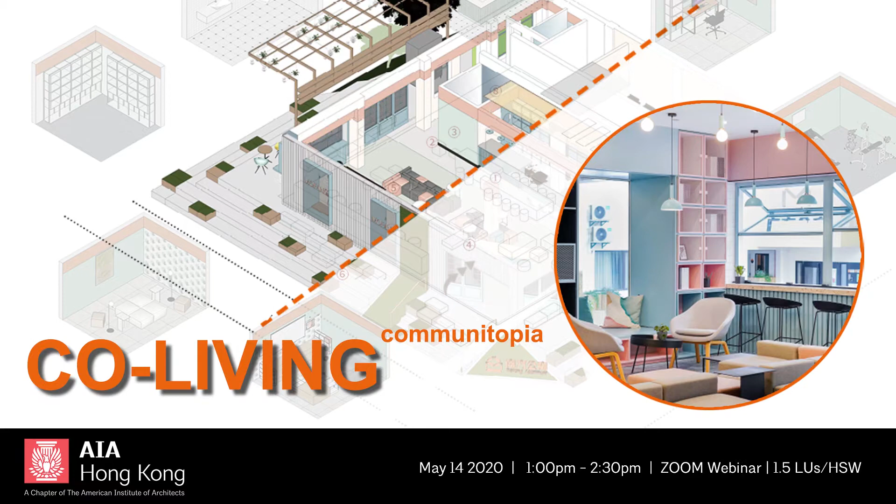So COVID-19 has affected all of us in one way or another. But before COVID-19, many urban centers were already experiencing systematic challenges and stresses. In Hong Kong, we were and remain divided over essential access to fundamental resources like affordable housing, office space, and education. The COEX series is where we take this moment of interruption to re-examine these three typologies, where we look for resources and design strategies to design more resilient communities for tomorrow.

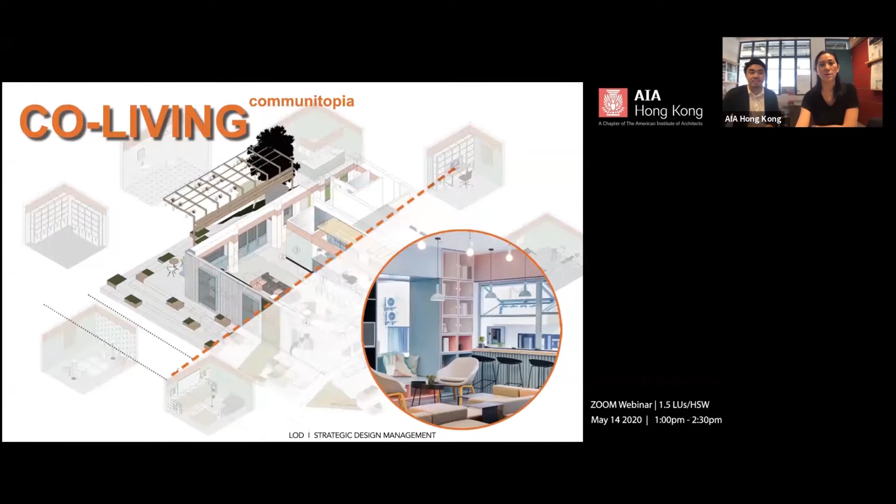So today we're going to share about our co-living projects, and we're going to go through our projects in China, and at the same time we want to introduce the idea of communitopia while we're working on the co-living projects, because co-living itself is, we see it as a utopian response to our rapidly changing society. So instead of just looking into providing affordable housing, we also want to use this opportunity to see how we can create a more caring community and integrate different user groups so that we can pool the resources together and build a new community use for the public.

So we have been working on co-living projects since 2015, and we have projects from 100 square meters, just working on a public space for co-living apartments, or large scale neighborhood and community planning that is over 100,000 or even 300,000 square meters on a planning level. So there are over 80 projects that we have worked on and over 1 million square meters in total. Of course, some are built, some are unbuilt, and there would be a total of about 25,000 rooms, units, I would say, that we have built.

And usually when we're doing co-living projects, one challenge is that we're working with old buildings. So at the same time, we are also dealing with urban revitalization and how to readapt the building to new use. And a lot of the buildings in China that we've been working on, they are probably vacant offices that are in the middle of city center, or they are industrial factories that are no longer being used and at good location, good neighborhoods. So a lot of the times the clients would like to turn them into co-living apartments, which they would be able to generate better revenue.

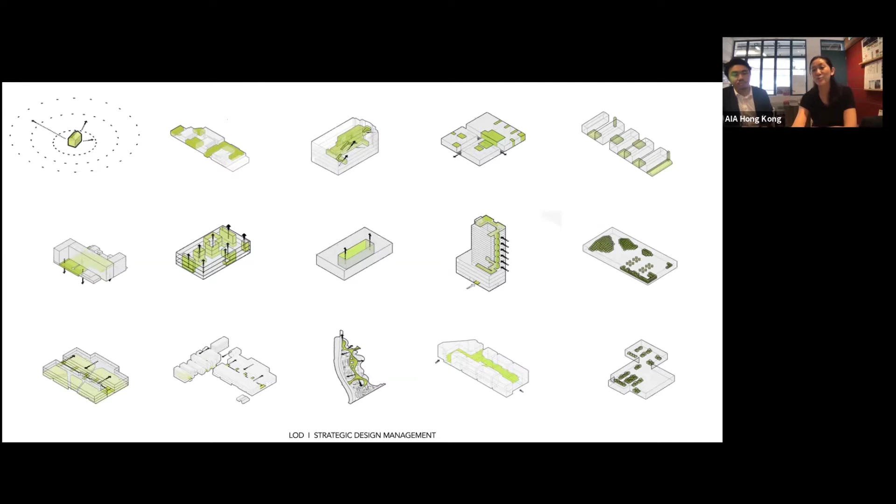We take every opportunity, if there's a little exterior balcony or roof garden somewhere, to turn it into habitable space, especially outdoor space for the residents, because it's always very nice to have this kind of space in your living apartments.

There are a few strategies that we employ when we're looking at co-living. We'll talk about them as we go through the presentation, throughout our different projects, and show how these strategies would actually happen in the projects.

Number one, we call it urban devices. We're trying to use these urban devices to recreate—as I mentioned earlier, a lot of these projects are actually urban revitalization projects. As we look into the city we're living in right now, there are a lot of...

memories or old neighborhoods, those kinds of community values and community services that we used to have in the old days—they are disappearing as we live in high-rise towers and very contained neighborhoods that are all fenced off. So we hope to use these co-living projects also as an urban device, so that we can recreate what we mean for city and community, and also reintroduce places like marketplaces, streets and alleys to the neighborhoods.

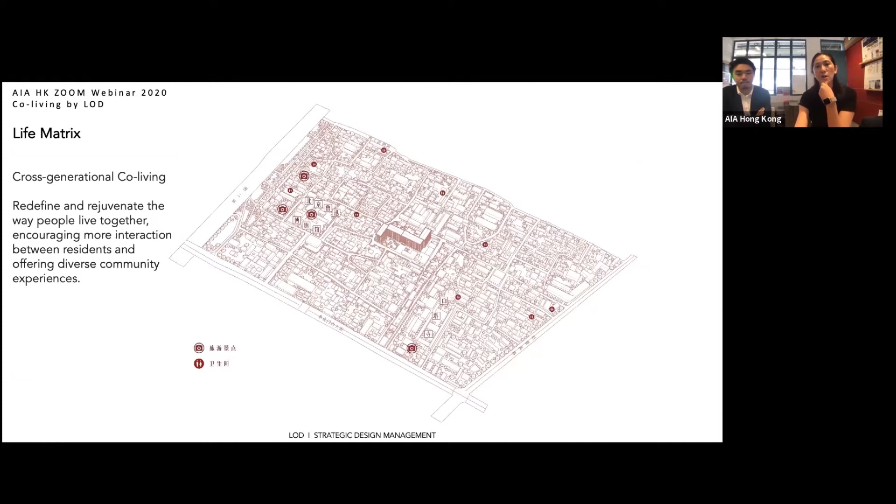We would like to use this project not as a fenced-off community, but one that can actually open up and serve as a community catalyst in order to regenerate the whole neighborhood.

The building is also very interesting in the fact that it already has an elderly home in place, and also a kindergarten currently in the project.

So the rest of the area is being able to contribute to co-living apartments, which we would target for the youth and also family. This is actually quite an interesting mix of users, because usually I would presume what kind of typical co-living users you usually have, and how this is trying to do something different. Would you be able to tell us more about the usual user group and the new targets?

Yes, so in some later projects, which are more specific small scale co-living apartments, they may be targeting a lot of the time the youth generation, the younger groups. So they would have facilities catered more for sharing, and also to maintain their daily functions while some facilities are not in the room. But the sharing, community experience, activities and events are usually the focus point for those projects.

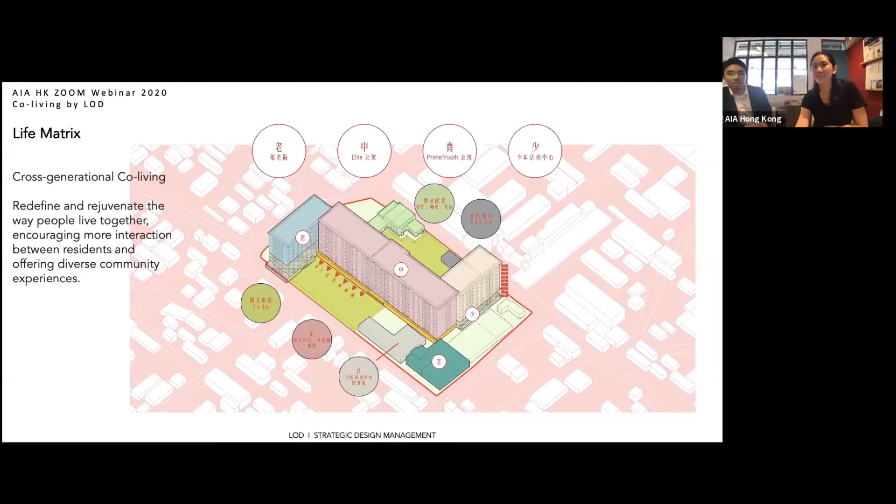I think that will be really great in the future if we get to see this diversity community specifically — this culture of inclusiveness.

It's just that now, when we're talking about co-living, at the beginning in our project we'd be more talking about youth apartments, providing affordable housing for the younger generation. But as the market keeps developing, and as the government tries to intervene to make sure communities are getting the kind of housing they need...

So from the government perspective, and also in our research, we start to look into different types of co-living for the different user groups. That would include not only age and income level, but also family groups, retirement homes as a co-living model, and also more oriented to a specific gender.

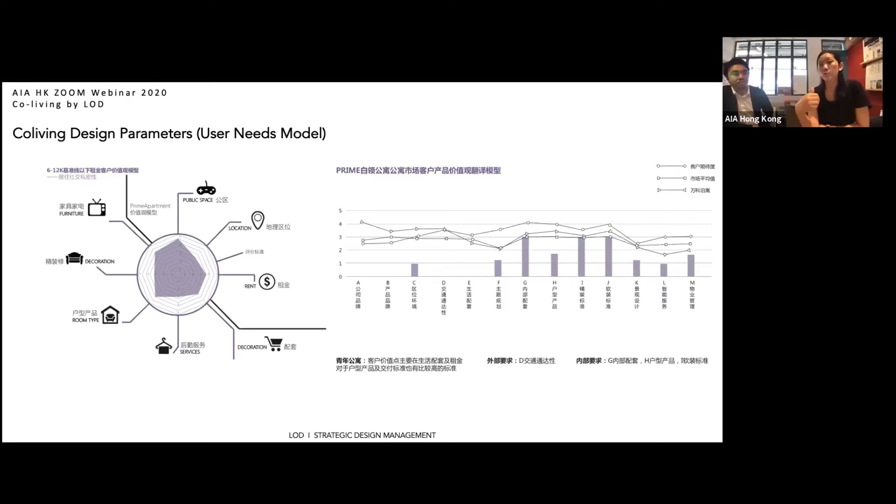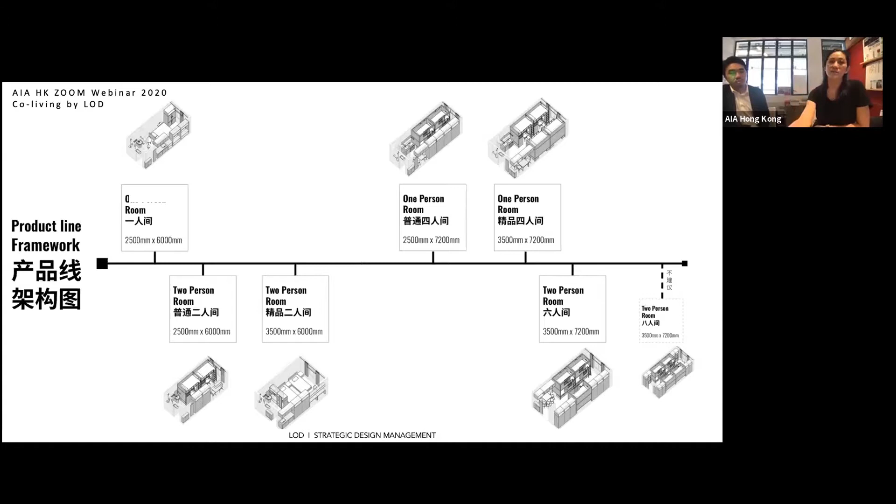That's why the public space ends up being different sizes depending on the different brands and products, because that's determined by the brand positioning and what they're trying to do. Then we'll also look at different room types based on the different user groups targeted in the project.

Well, I think the mixture of social sectors and also age and various professions is going to be very interesting to see.

And also this kind of thing actually has a huge impact on how the design and everything is. It really is about both the designer and the operator being able to set aside just profit, but then to really encourage social interaction. Actually, from the business operator perspective, will they set aside their profit?

Of course they will not. That's why the designer really has to push this even more. And what we would do is, that's why we get into the business model - we have to have a very deep understanding of what they're trying to do, so we can comply with what the operator and client wants.

But at the same time, you can add additional value and potential to the project. So being a designer in a project like this is about how we can use the opportunities to bring in additional values, which may have social impact, and also about the social responsibility of the architect to do this kind of work.

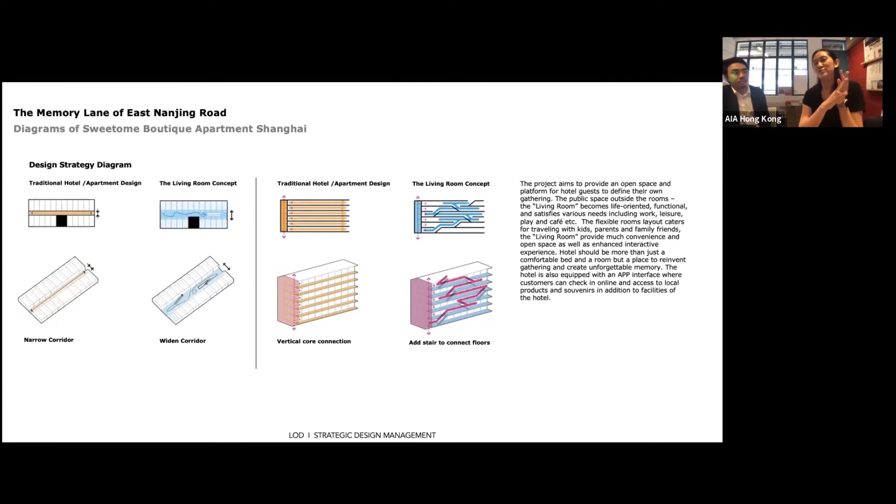Instead, we made this into a living room, and we considered the 5 levels of the project as a big home for everyone. This is actually the Shanghai prototype project, so here we tried to put in different user groups and different functions for different user groups. For the different levels, we classified them as dining room, living room, kids playroom, and workroom.

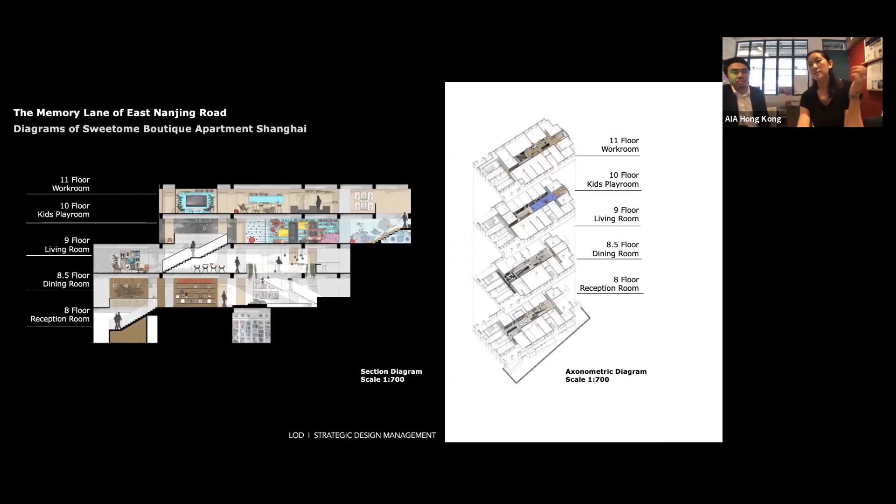At the same time, it also means we want specific user types that may be placed more likely on this room level. And of course, they are welcome to share all the public space within the project.

The nice thing is that not only did we raise the project positioning—because at first it was probably a very low-end 3-star co-living project, but we tried to turn it around—now of course the client has to invest a bit more, but they also get a much better gain. The project is very successful, with close to 100% occupancy rate since 2015, almost always occupied. But of course, it's a very good location too.

But the most satisfying thing when we look at this project is the living room concept, and how, when we were visiting and staying there, we saw people just leave their door open. People would be working outside, like teammates or colleagues in a business trip scenario, working outside or lounging and watching their phone in this space.

For the family groups, kids would be running around in the living room space, while the adults feel very comfortable because it's a very cozy space—you feel very safe inside, instead of like a typical lobby space. You can also see people traveling in groups, coming out after they shower in their pajamas, sitting outside on the lawn, chatting for hours before they all go to bed.

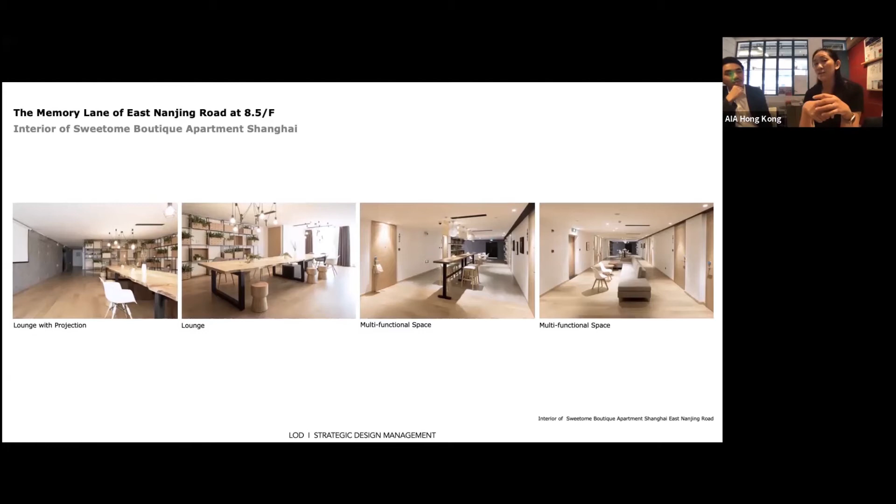So it's a very interesting business model. Not only is it challenging the traditional short-term hotel or service apartment in terms of space and spatial arrangement, but you can also see how the space itself can actually change people's behaviors.

So I think this is a good point, because from what you are describing, this could easily be categorized as service apartment or even a hotel, right? How would you see this mode of co-living differentiate itself from the typical short-term hotel or service apartment typology?

Specifically for this project, when we're looking at co-living, first of all it would be different from hotel in the sense that hotel wouldn't provide a lot of the living amenities. So here we still consider a very simple kitchen counter where people can make food if they want, although not actual cooking with smoke exhaust. Another feature usually in co-living apartments is a washing machine. For this project we had the funding to put the washing machine inside the room, while some other co-living apartments might just use a shared laundromat, like lyf is having.

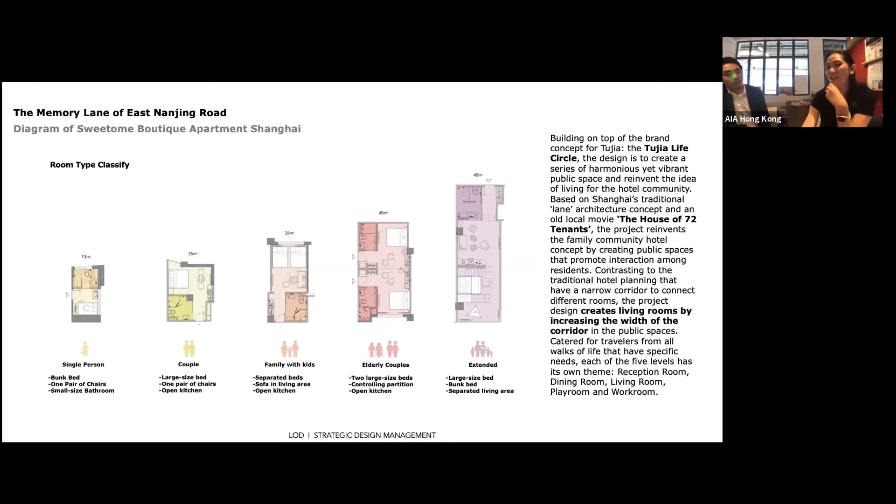In any case, this would be a bit different than the hotel. As well as for service apartment, because in the traditional service apartment you may not have the type of community facilities - everyone is like by themselves, in their own room. You may have a lot of business facilities in traditional service apartments, more like a traditional lounge space. But here you can see the space is actually targeted to be more community, kind of vibrant, doesn't feel as cold.

It just really feels like an extension - I think the difference is especially the location of this living room. It feels like an extension of your room, of your home. While in a service apartment you still feel like you're going to a different space, going from a private to a public area. But these are more in the middle, in between.

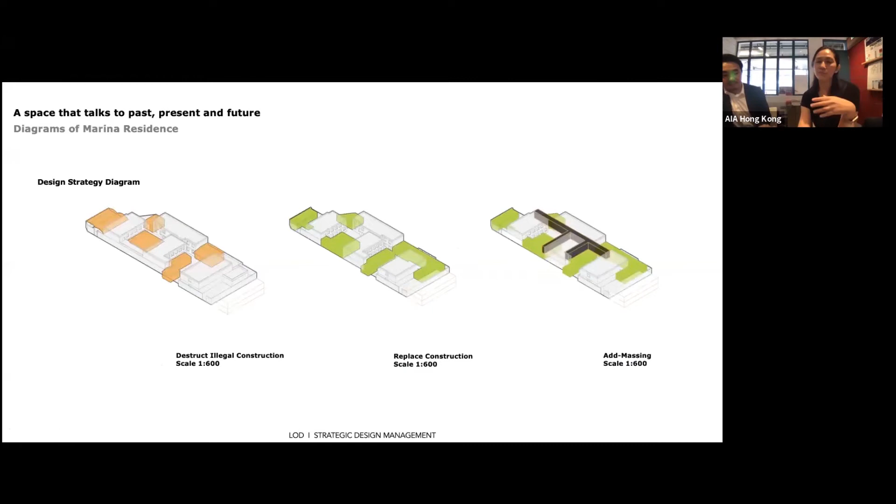And then when we're looking at hotel and service apartment, we have done comparative analysis for most of our clients in the sense that hotels are more targeting short-term stay and full capacity service, while service apartments are for long-term stays but also full service. But for co-living apartments, we're looking at more limited service. Different brands may have different strategic positions, but they usually focus on providing less service, which means cost saving and easy operation from their perspective.

This project is our Marina Residence in Beijing, situated in the Hutong area. When we received the project, it was actually some rundown buildings, quite broken into pieces, and we tried to connect them and rebuild them into a co-living apartment. This is also for short and long-term stay. At the beginning it was again targeting to be just a regular mid-range co-living apartment.

But because of the very strategic Sanlitun location and also being very nicely situated in a Hutong neighborhood, we wanted to recreate some of the existing courtyard space that can talk to the neighborhood, and also turn it into a co-living apartment targeting a high-end audience. In the end, we turned it around, and this project rents for 15,000 to 20,000 a month for a room, even though they're very, very small rooms, because it's a very good location.

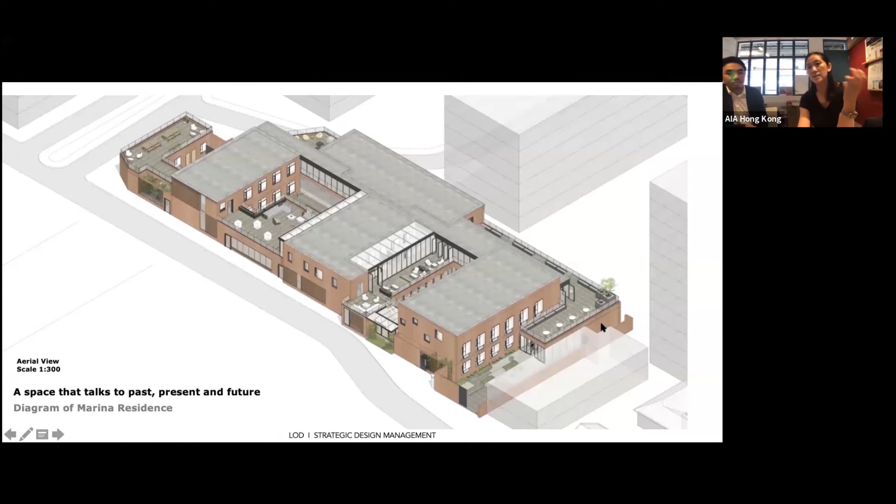At the same time, there is short-term and long-term use, so it's a mix between a hotel and service apartment. And there is a portion of the building with especially small rooms and loft space that we suggested to the client they could use as an Airbnb model.

Can regular people just walk in? Are there components, like the lounge or the restaurant, or just the neighbors, would they be able to enjoy it?

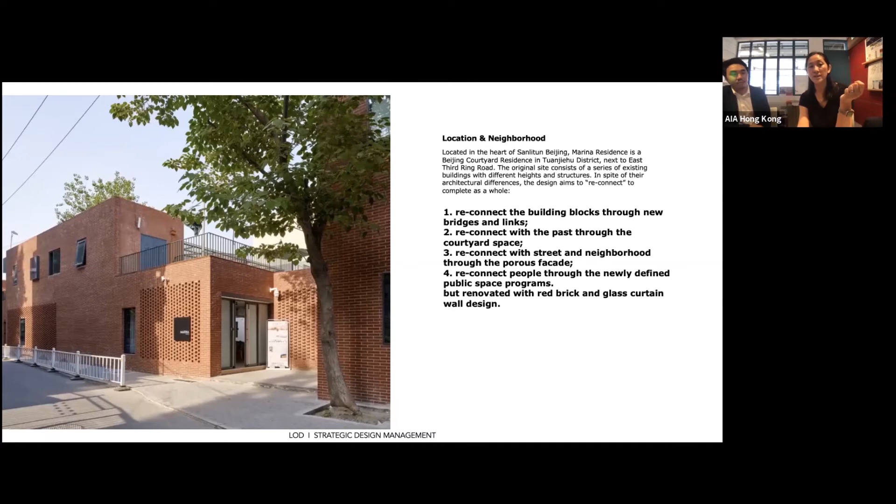With the facade that is trying to introduce the porosity, and also the exterior courtyard space and the roof gardens, we encourage the client to open it.

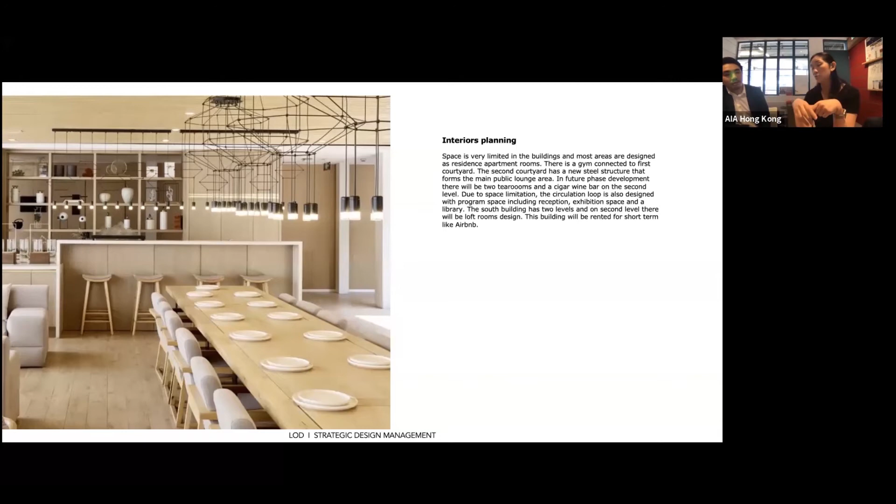During operation, they will have more concern, so they actually would open to the public and other outside groups during events, because they also host a lot of events and activities. But at other times they might want to protect the privacy of the residents, so they would keep it as more of a contained neighborhood. But still, I think by introducing a lot of this indoor-outdoor courtyard space and roof gardens, strategically the residents are still connected to the people living here, even though they may be from very different groups.

Because the neighborhood building may be a very traditional Beijing family, while this building may be used by travelers, business travelers, or expats and international communities renting these apartments.

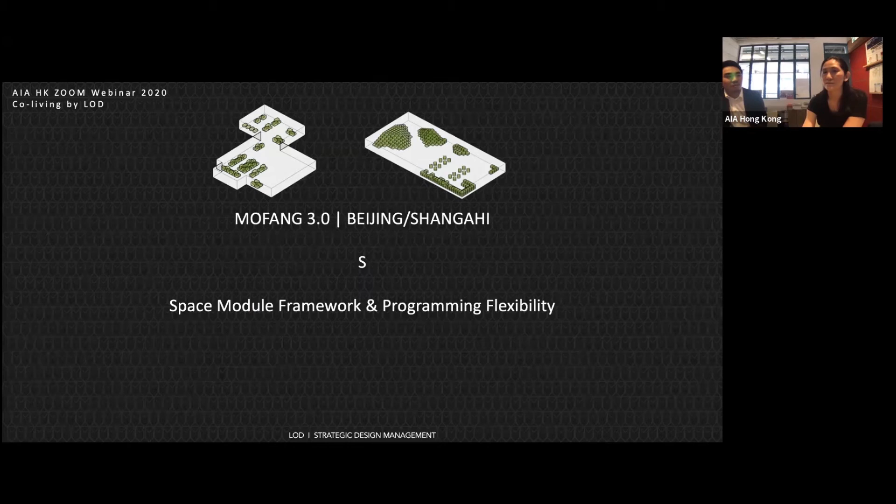So are there any sort of challenges in this type of neighborhood where you've inserted this new energy? I'm sure there must be daily operations you have to take into consideration during design. Are there things, either internally as an operation, or to the community around, that present challenges in dealing with these forces?

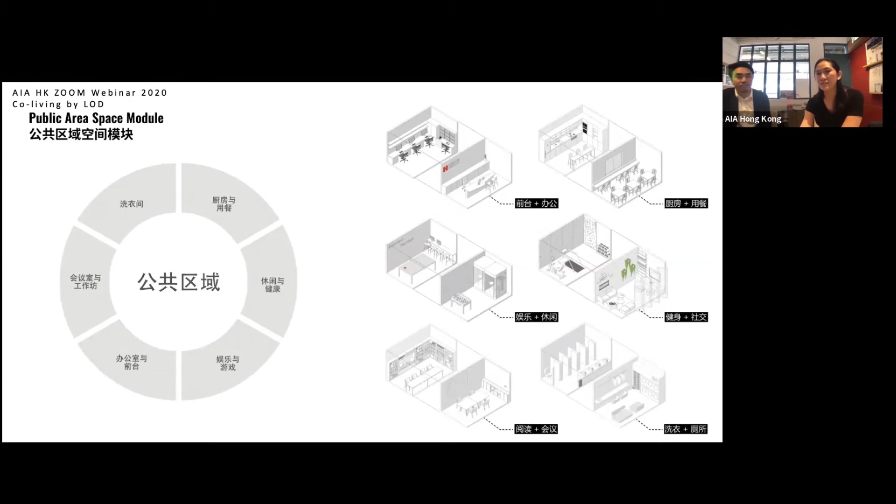Actually, there are a lot of co-living apartments that tend to open to the public, especially the common space, the public space, with lounge, cafe, and library facilities. They're open to the public, and it's nice because as you look into these functions, we identify them as fully open, more ambiguous semi-open, or more private like the gym and workspace. The reception area, cafe, and library tend to be more open to the public.

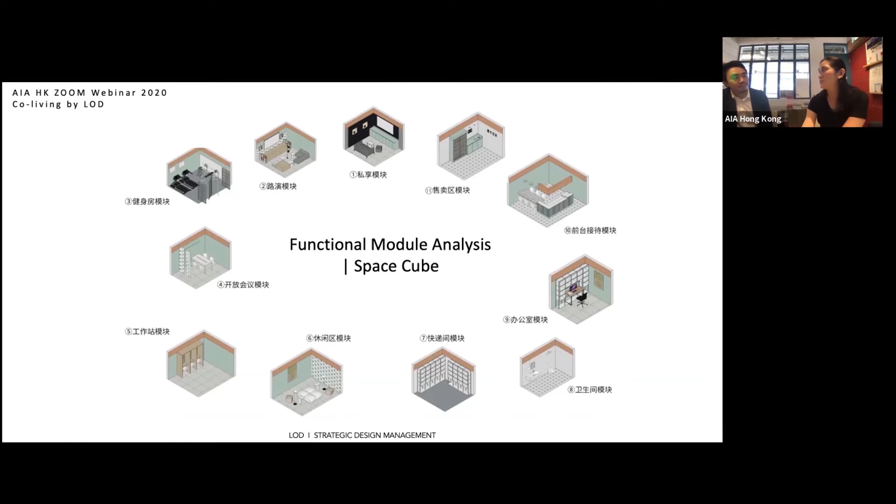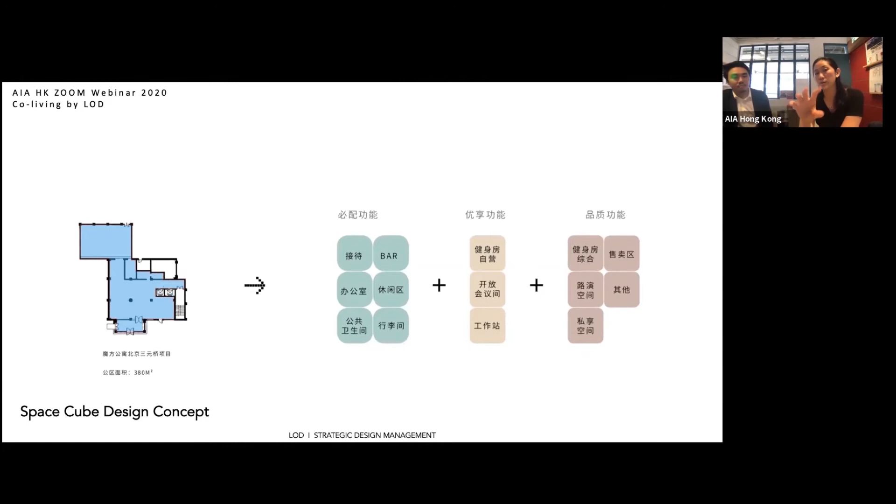So when we are doing the design, we look more strategically into how we can define the functions per different projects into different modules, so we can insert these modules into the project and start planning based on the importance of these functions to the user groups, to our residents inside the building, and at the same time according to the operator's wish, because it depends also on the project location to make some space open to the public.

For example, this project in Beijing Sanyuanqiao is one of the feature projects of the Mofang apartments in Beijing. This is where they would bring their clients whenever they want to show their best project—like the showroom for co-living, the showroom of their brand.

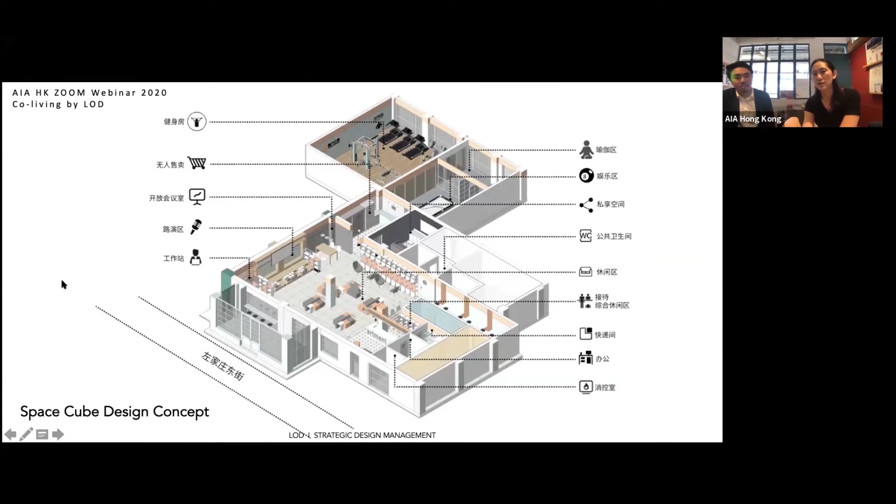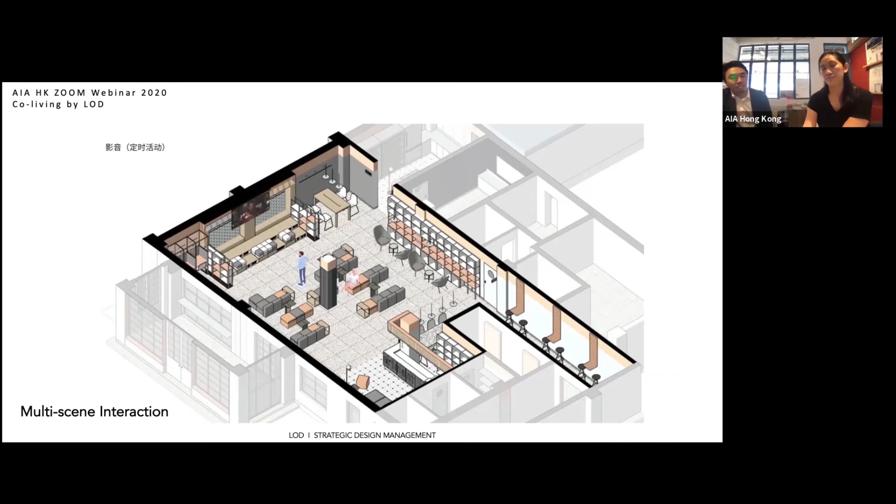Here, besides satisfying what they want for the customer, we also introduce a flexibility model for the main space. We design it so the space can change according to different scenarios, which usually happen for co-living projects when residents may want to do different things at different times, and operators may want to introduce activities for residents or for their own training. At the same time, when it's open to outside groups, they can also change the setup of the space to make it flexible.

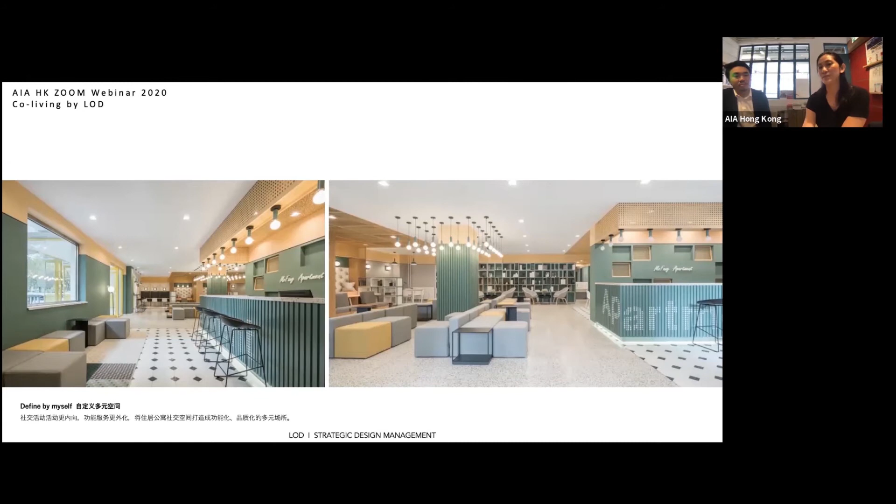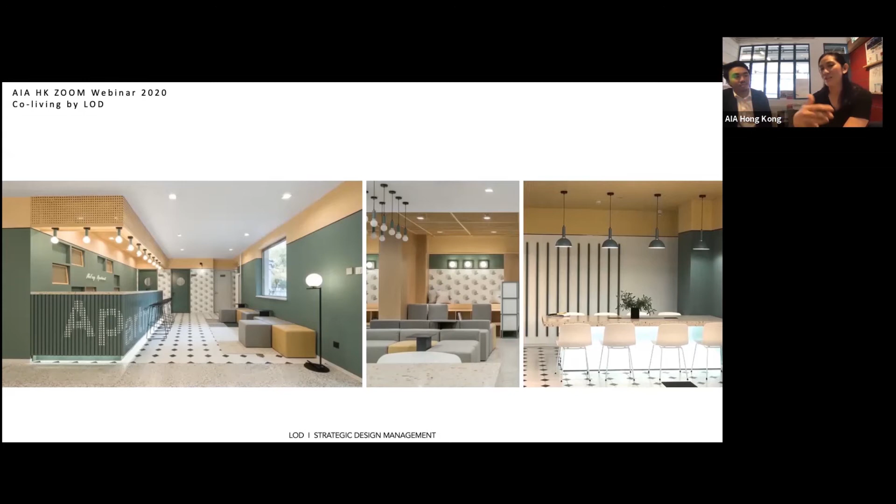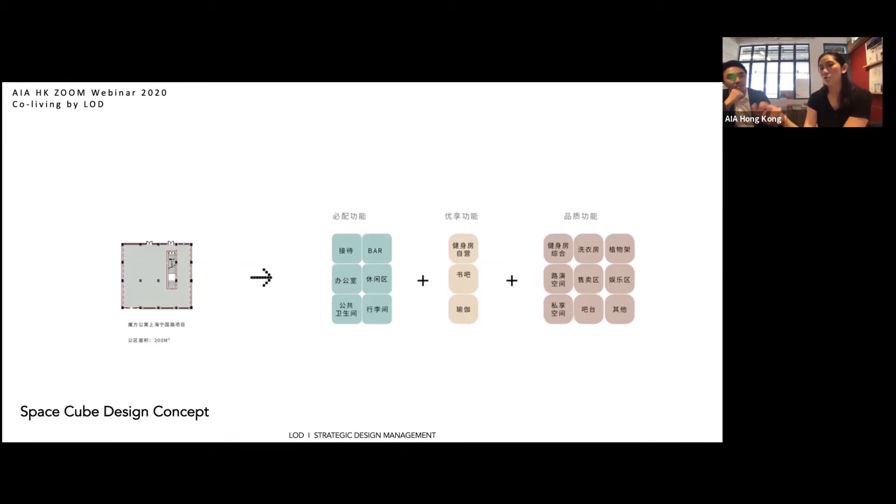One reason is it's a smart way to use the space, because the amount of public space the co-living brand is willing to give to the public, just like in real estate, has to be shared between the residents. So shared not only meaning the functions, but also the cost. The more public space you allocate to the brand, the harder for them to break even the balance. So for a lot of these typical projects, they may assign something like 100 to 300 meters square, depending on the target user group.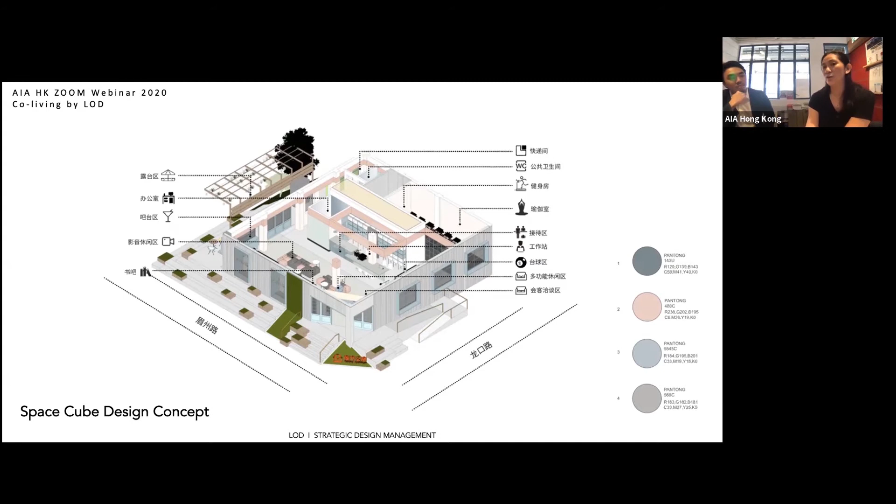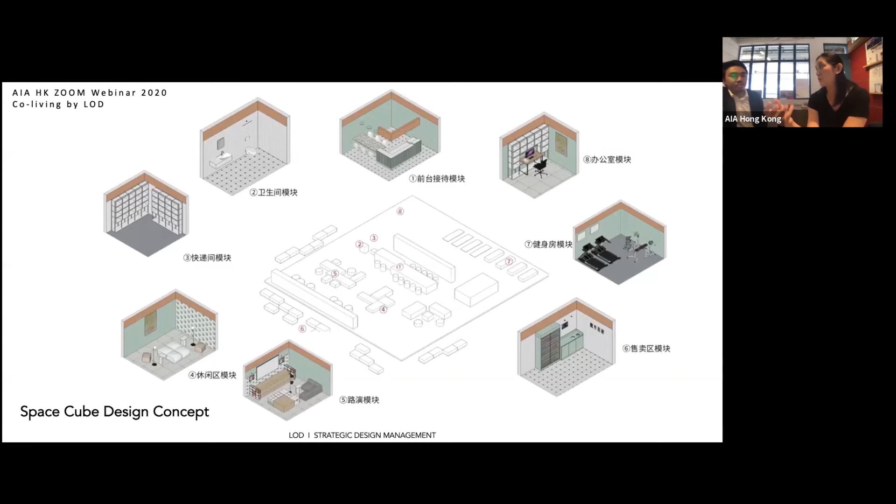If the target is a high income user group, the rent is higher, so you'll be able to assign more space for public facilities and provide a bit more. But for some lower products, they might just assign a minimum of 100 to 150 meters square. So when you have very little space but want to accommodate the same functions for the shared community, you try to figure out ways to do smaller, more flexible modules, and that's why programming flexibility is important in cases like this.

At the same time, like we were saying at the beginning, whenever there are outdoor opportunities, we take advantage, because outdoor space is not counted. But it really depends on the project and the architectural parameters we were given.

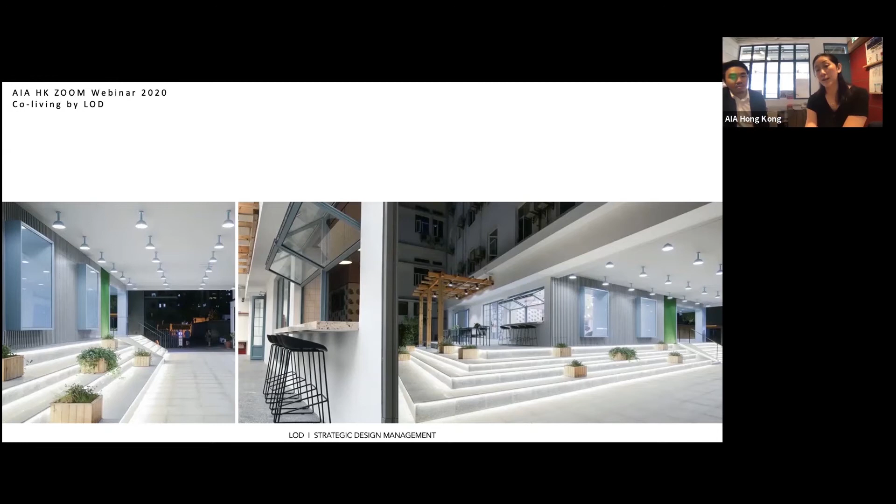For example, this same client, but a different project in Shanghai, we actually have a really big courtyard. So we figure out ways to do inside-outside connections, and we design the courtyard space to be part of the co-living space. That's why for some of these projects, when we have roof gardens, courtyard space, or sky gardens, all those can be added to the functions of the co-living community, but at the same time they're not eating up the GFA.

I think all these lounges and communal spaces are great—they look stunning. I'm also curious, given the amount of projects you've done, are there any special shared or communal spaces, in addition to lounges and cafes, that you found surprisingly popular?

That you can share with us.

So I'm going to share about the lyf projects, which Doris already introduced in the beginning. So some parts I could be shorter, but what I want to talk about is how we start with the design, and instead of looking at just the operations and functions, we actually look into the behaviors and the experience. It's these parameters that start to inform what the space should be. Instead of talking about a laundromat, but actually what's happening in the laundromat and what kind of experience our users are getting while they're doing the laundry.

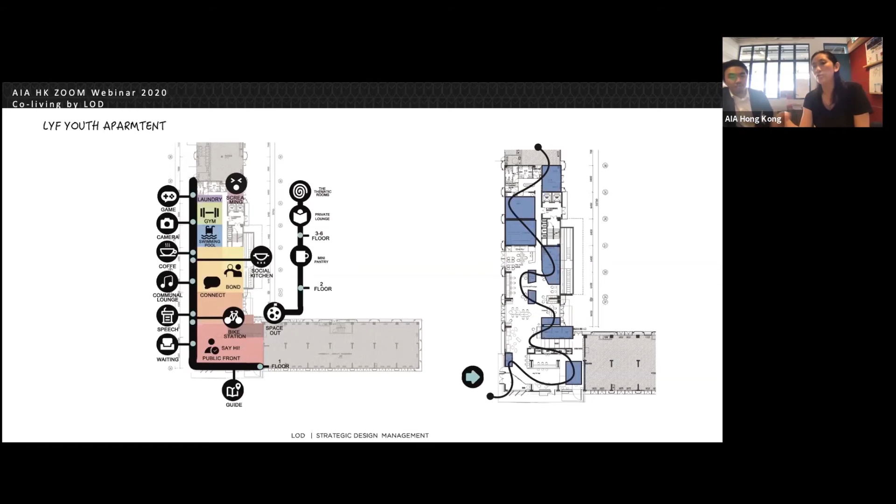By doing this map strategy, we link them back to the actual space, and we envision how our residents, when they come in, go through the space as a way to interact with the space, the functions, and also the rest of the people. And it all comes from not only the inside, but also the outside, at the public front.

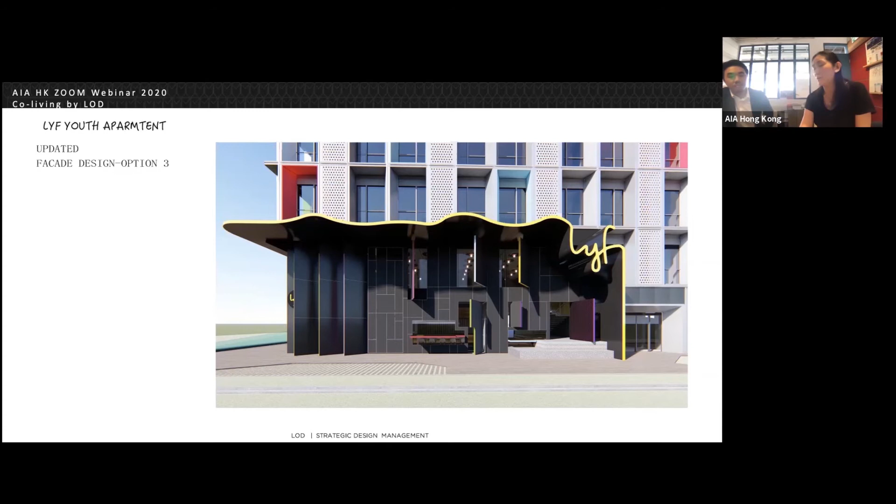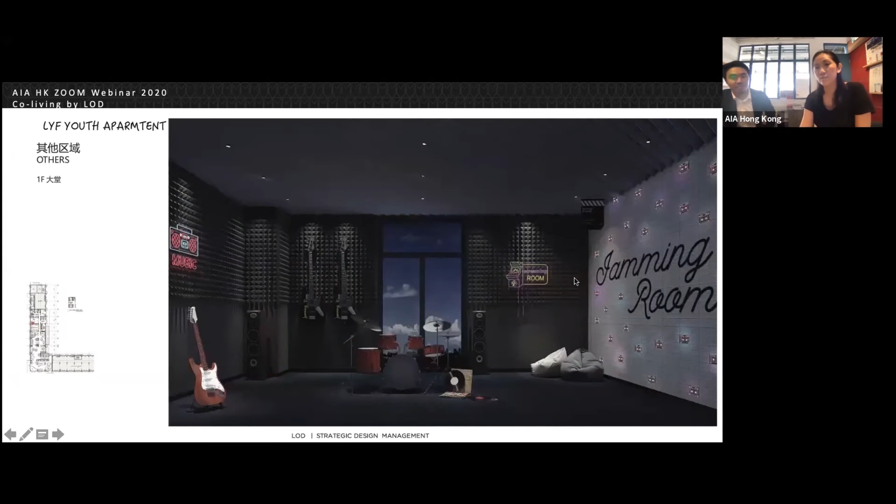And the swimming pool, as Doris has mentioned, is a new kind of way to envision a meeting space. So the swimming pool is actually a place supposedly for meeting, but instead of a traditional conference room, you see a very relaxed and multi-purpose gathering space. So instead of a pool party, you have a pool meeting. And you still can have a pool party - that's the cool thing - or you can have a meeting that is the pool party.

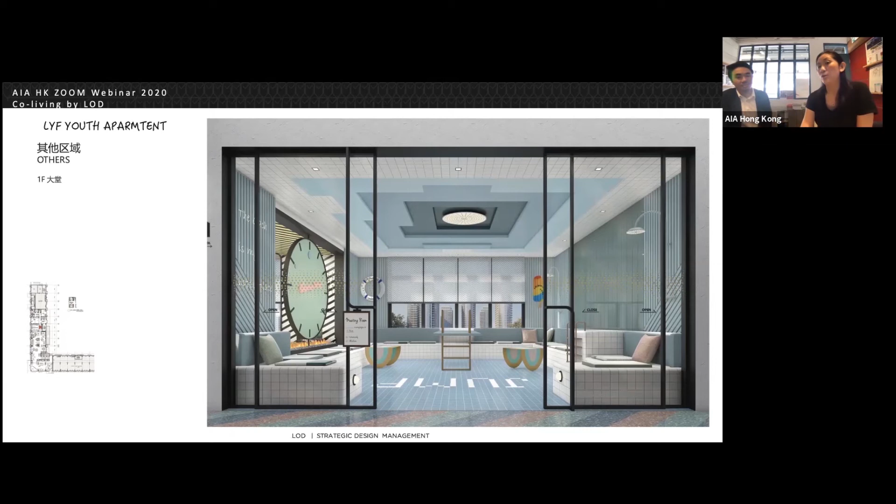And here we also introduce interactive elements. For example, we want this to be like a bubble machine, so that when there are people inside and you're actually having a party, not a proper meeting, you'll be able to have interactive elements in the space. But at the same time, when you actually have a real meeting, there will be a projection screen and other amenities that cater for such things to happen.

And Paul is also asking for some surprising elements that happened in the co-living space design. The jam room is actually another idea coming from the lyf brand. When I went to visit the SMU prototype in Singapore, which I showed early pictures of - the 3x3 grid - that's the prototype they built at SMU. They used these millennial groups to test out the functions they want to incorporate in the final brand. And surprisingly, there are some functions like the social kitchen.

That's why now you see in the lyf product, we have a huge social kitchen elements. It's proven very successful in the Funan project, their first launch project.

But also the jam room is another interesting function that in the SMU prototype, they only have a very small room, like maybe almost a 2x3 meter square room. And then they put some musical instruments there, but it turns out it has a high booking rate. There are a lot of students that will go there to sing and play a band song or just to listen to music. So it becomes very interesting when you probably wouldn't think these functions would be popular.

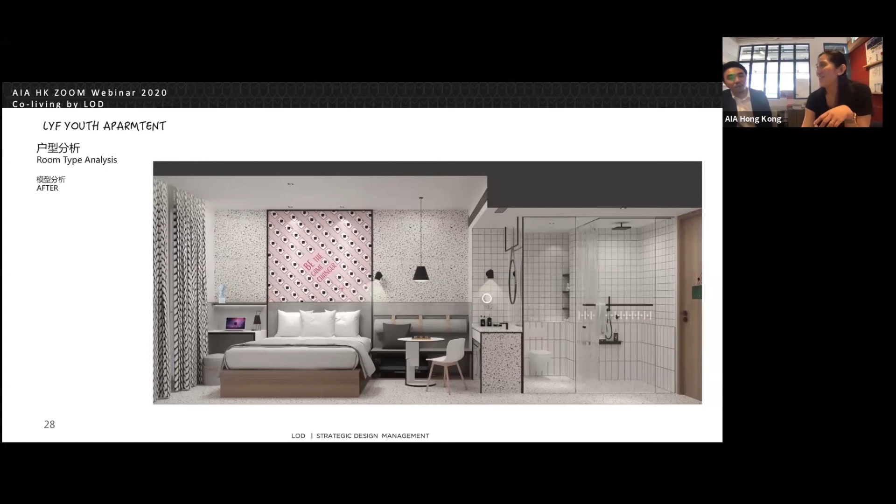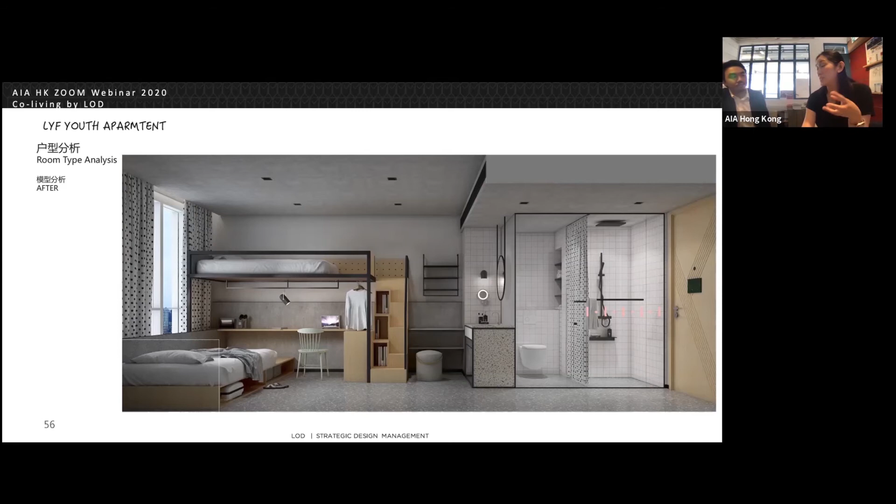Unexpected, yes, as a program that you would insert into a co-living. Yes, but in the end, a jamming room like this, a social kitchen, or in some other projects, we would introduce elements according to the specific project, so that they would be more catered for the groups that are living there.

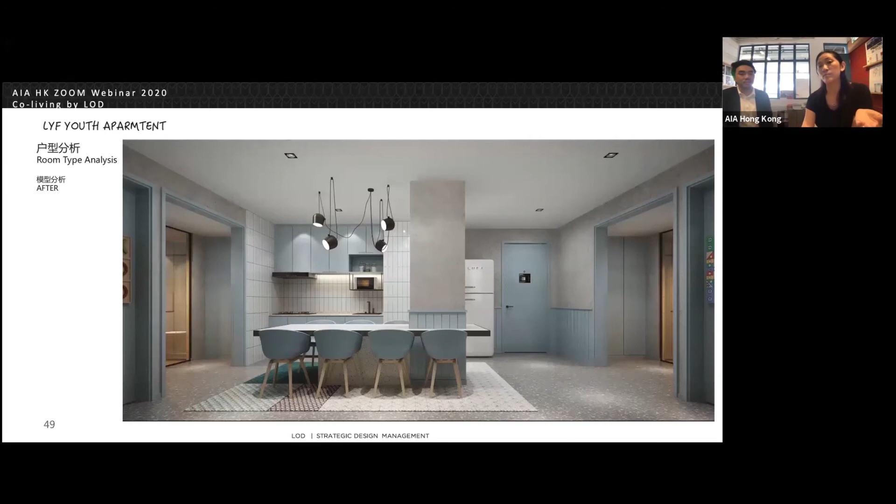And as Doris also was mentioning, in LYF, the 2-bedroom apartment, 4-bedroom apartment, or 6-bedroom apartment turns out that they are renting it for like travel companions, or the 6-bedroom are actually rented to the corporate enterprise all year around. It's used a lot for corporate teams that would need to travel and stay for a project, maybe for a month long or 3 months long, and then we just rotate internally. So that's why those rooms turn out to be very popular.

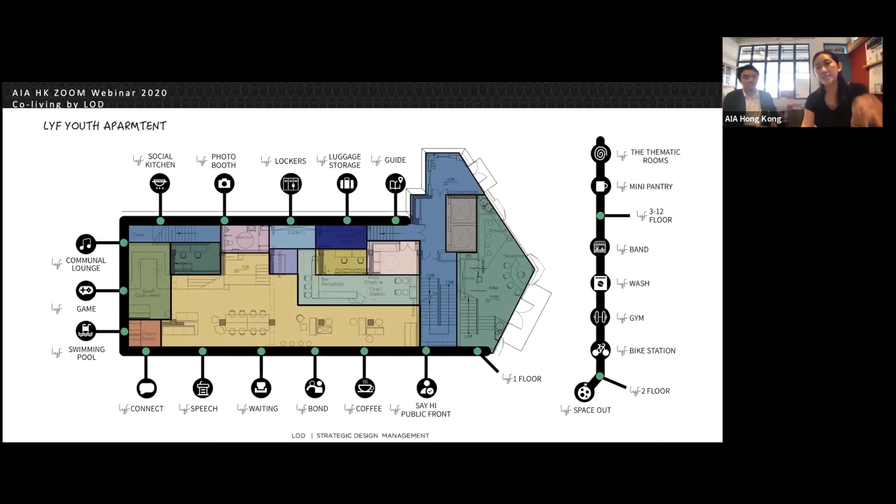I think that's actually a lot of information to be fit into such a small amount of presentation time. So for now, I would like to open up the floor for the audience. Please type in your questions, or even speak up via the video and audio.

Switch the camera to you guys. Okay, we can stop sharing. Stop sharing first. Yes. Okay, good, does it work? Yes, good. Let's go directly to the Q&A. I think it's just in chat. Just in chat, yeah. So okay, let's see what we have. I think there was a Q&A. Yeah, but there was a Q&A, where is the Q&A? I cannot open the Q&A. When we click, there isn't, or maybe it's a different window. Let's see if there's a different Q&A window. Yes, if not, we can scroll here.